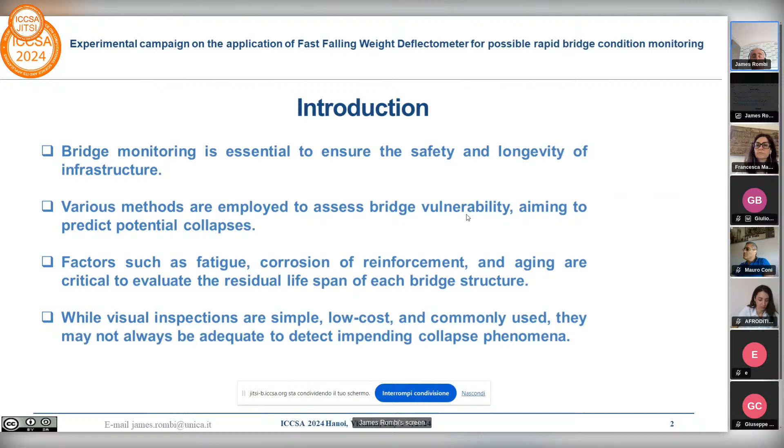As we know, in 2018, there was a large collapse with the Morandi Bridge in Italy that prompted a significant call to improve monitoring in road infrastructure. This triggered widespread attention for the formulation of specific guidelines by the Italian Ministry of Infrastructure and Transportation.

On the basis of this information and what happened, we thought to develop a non-destructive, rapid, repeatable over time, efficient system using the fast falling weight deflectometer to perform tests on reinforced concrete bridges. As we know, the fast falling weight deflectometer is a non-destructive measuring system used normally in rigid, semi-rigid, and flexible pavements to evaluate stiffness and pavement stresses across various types of materials. In this research, we use it to predict and measure the stiffness on concrete bridges, divided into single span and multiple span bridges.

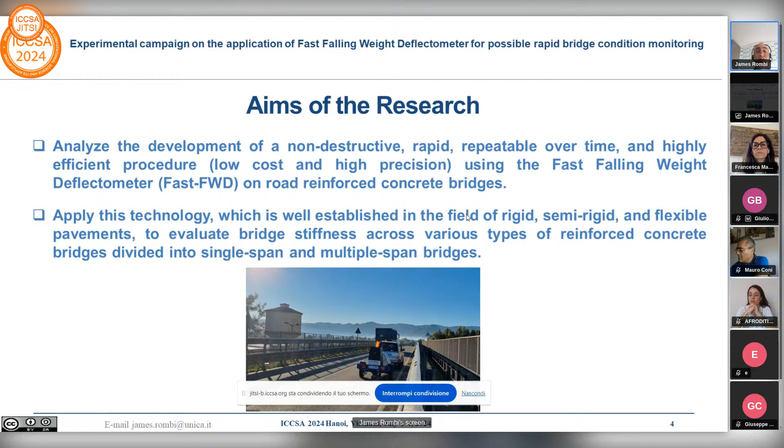So let's go to the case study. The testing campaign was conducted on 8 reinforced concrete bridges located in the southern region of Sardinia. You can see here in these pictures the location of each bridge that has been tested. They are all in the province near Cagliari, in the southeast of Sardinia.

On your right, you can see a table with the bridge type, the 8 bridges, and some geographical information, the length and the width. Also additional information that was useful for us to locate exactly where the bridge was, because these are bridges all located on roads, and some bridges were overpass arch bridges on railways.

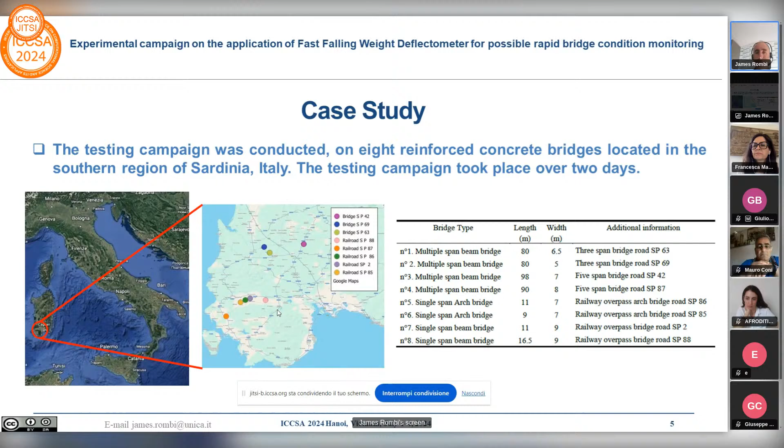So we had 2 big families: multiple span bridges, there were 4, and the other 4 single span bridges, divided into single span and arch bridges. So, before performing the test campaign, a schematic grid of testing points was established for each bridge, taking into account the geometrical structure. As we can see in this chart, this is one of the bridges that we tested. There is a total of 45 testing points.

The circles that you see in different colors are where the falling weight performs its tests. The circles marked in purple are performed on the deck. Then we've got the red in correspondence of the beams, and the green ones are those tests performed on the approach ramp. For each bridge, this was done. So once you go to perform the test, you know exactly where to position the falling weight deflectometer.

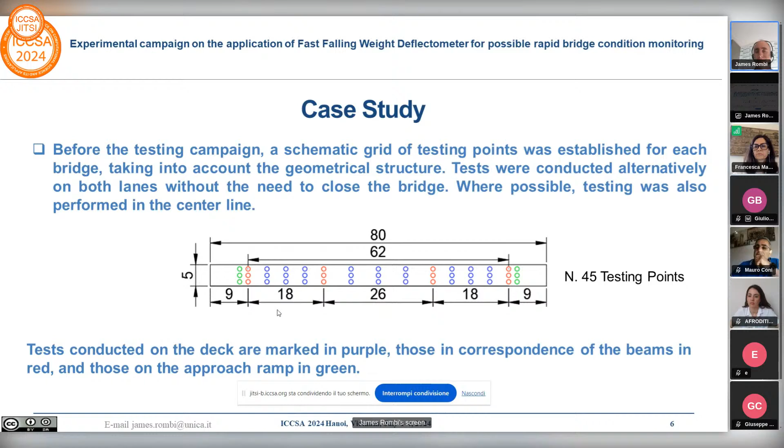It performs a dropping of weights on the surface from a specific height, and with geophones we are able to measure the speed and the extent of the deformation on the pavement, in this case, on the bridge structure. To better understand how it works, we see here this short demonstration.

The falling weight goes into position on the element that we need to test. We lower the bars with the geophones. The weight rises, and then it drops. The geophones capture the deflection bowls. We must say that in this case study, we used in total 12 geophones. Then you raise the plate and you're ready to go to the next point. All this procedure lasts less than 1 minute. So it's a very fast testing procedure.

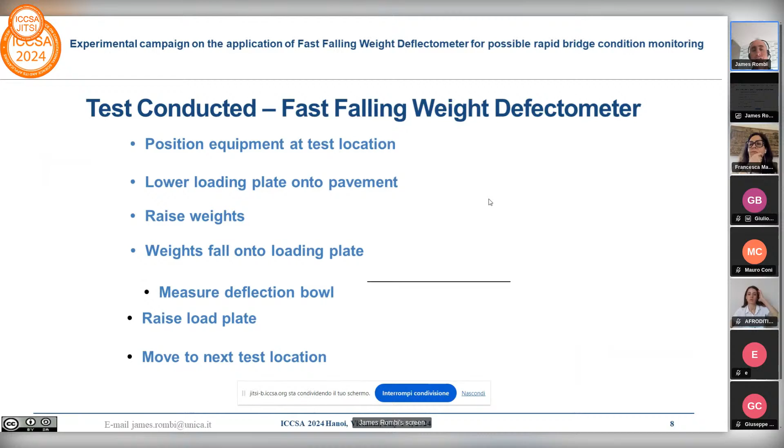So let's see the data analysis. I must say that this is just the beginning of this research, so we've got many data to analyze. This is what we analyzed first. The methodology employed the analysis of the stiffness value obtained from the ratio between the maximum load applied and the maximum deflection. When we did testing, we did increasing vertical stress levels. We performed first 900 kilopascal, 1200, and finally 1600.

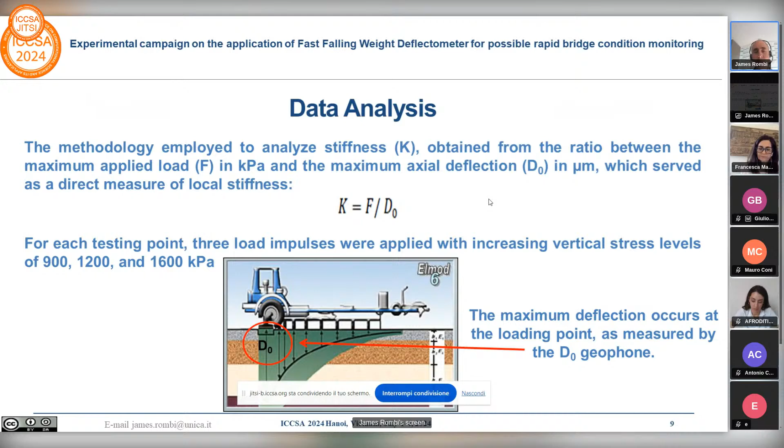On the basis of this result, we measured the maximum deflection, measured by the geophone D0 that is positioned underneath the load plate. Here we see the first data analysis on the first 4 bridges. I must remind you that the first 4 bridges are those with multiple spans. We can see the values obtained for the beam, the deck, and the approach ramp. We measured not only these values, but also the standard deviation between these values.

As we can see, the maximum stiffness was obtained by measuring the beam, and the lowest was on the approach ramp, but that is expected because the approach ramp is not made of concrete, but is a normal layer with bitumen and a foundation with granular materials. So it was just to see how the data could vary in measuring different types of materials.

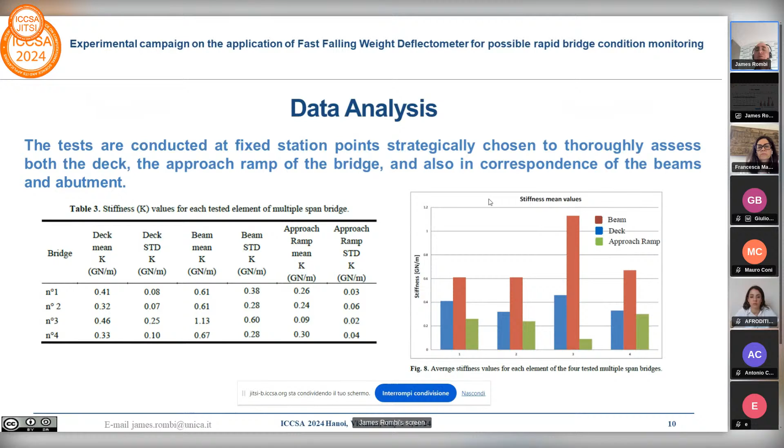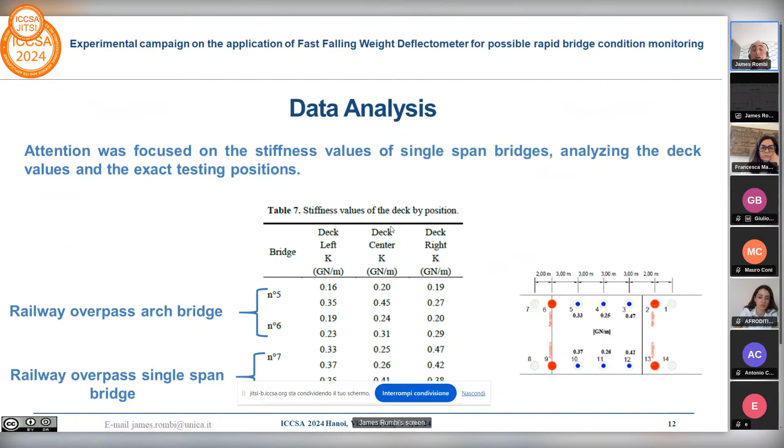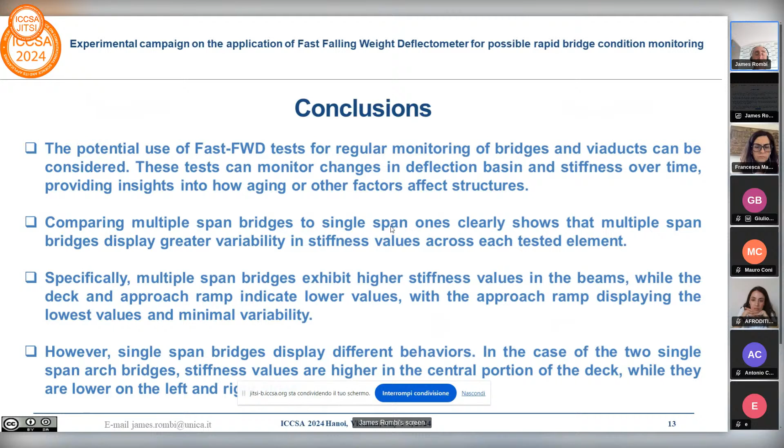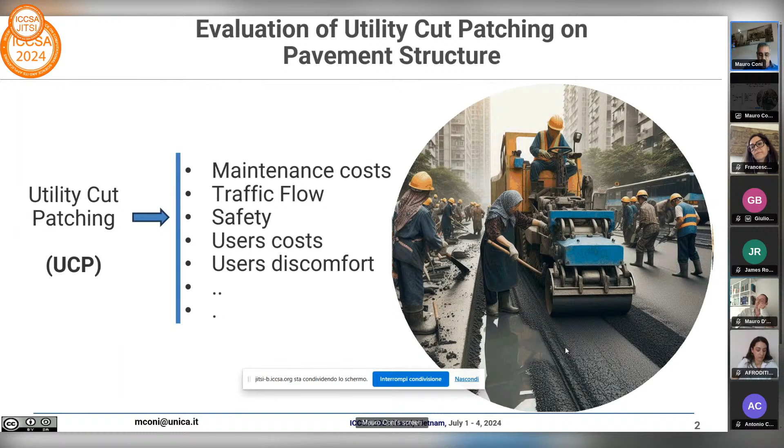UCPs disrupt the static behavior of the pavement, producing cracking, permeability, and friction deterioration. Structural strength, stiffness, durability, and reliability decrease, while deformation and dynamic load increase. Despite the importance of UCPs for infrastructure maintenance, there is a critical lack of quality control in their execution, resulting in rapid deterioration of the pavement in a few years. These reasons have led many road authorities to investigate how to control and reduce the impact of UCPs on pavement.

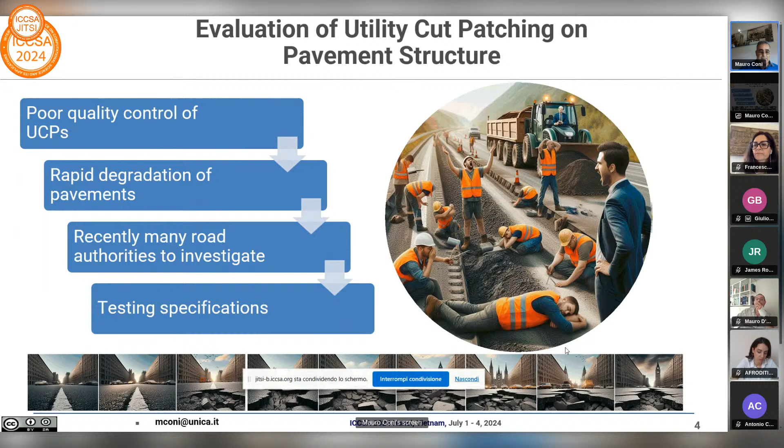In the paper, we present a case study of a bidirectional urban road where a water pipeline was constructed in 2019 in one of the two lanes. The bituminous pavement was cut to a width of 70 centimeters and a depth of 100 centimeters to install the water pipeline. The filling substrate material was the same as the excavated one, and no information is available about its compaction. After that, the pavement was restored with the same thickness and material.

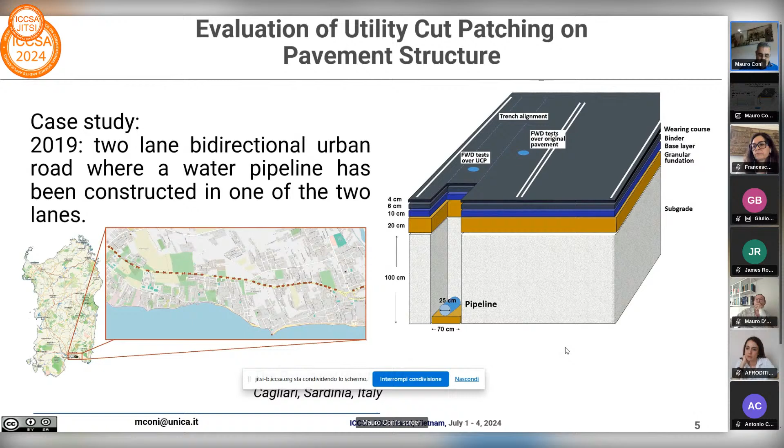The effect of UCP was investigated using the in situ non-destructive falling weight deflectometer, comparing the structural quality of pavement with and without UCP. As the previous presenter James showed, the fast falling weight deflectometer generates a sinusoidal impulse of 30 milliseconds in a window of 60 milliseconds and loads a circular plate of 30 centimeters with higher resolution. The test was repeated 3 times, and in the analysis we refer to the largest impulse, corresponding to about 9 tons on the plate load.

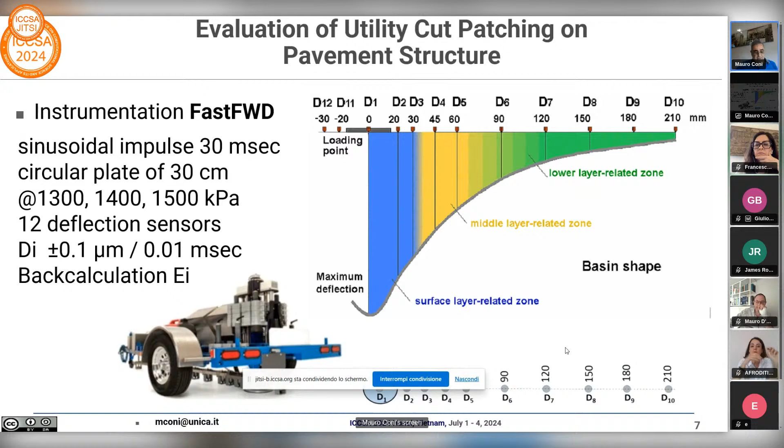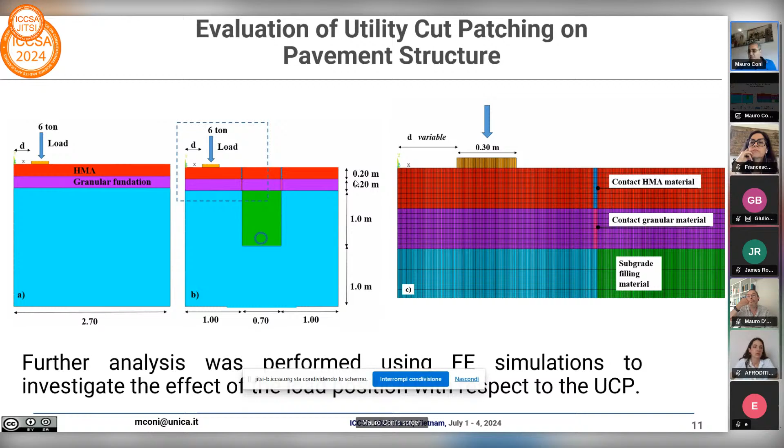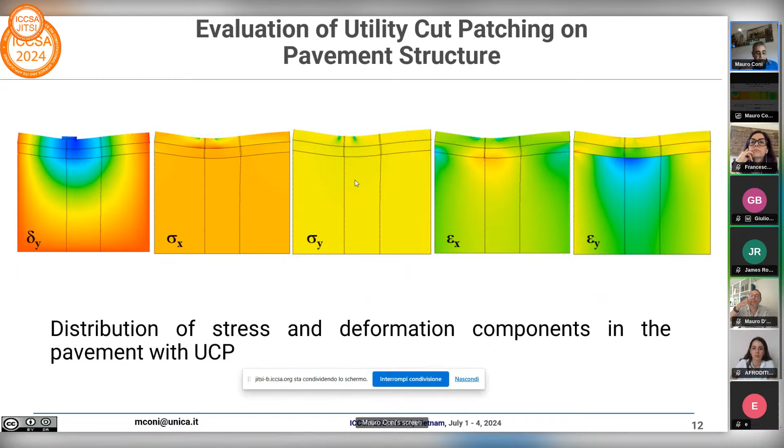This figure shows the distribution of stress and deformation components in the modified model, assuming a load located above the left joint of the UCP. Of course, the response depends on the position of the load. For this reason, one of the aims of the finite element simulation was to assess the effect of the load position relative to the UCP. The load, represented by a circular plate load of 6 tons, was located at different distances from the border of the model, and we derived the profiles below the load axis of displacement, horizontal stress, and horizontal and vertical deformation. And this is the summary result.

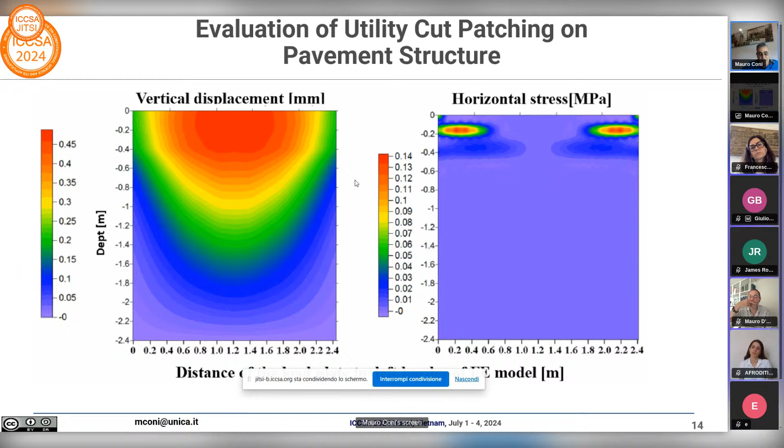The maximum deflection, about half a millimeter, occurs when the load is located at the center of the UCP. Values very close to this are also observed for load positions outside the UCP in a large range around it. The maximum values of horizontal tensile stress, about 0.14 megapascals, occur in the granular foundation when the load is located outside the UCP.

Similarly, horizontal deformation results in tension at the base of the asphalt when the load is placed at the border of the UCP, with a value of about 150 microstrain. Lower values are obtained when the load is located at the center of the UCP. Finally, vertical deformation reaches a maximum value of about 350 microstrain when the load is centered above the cut.

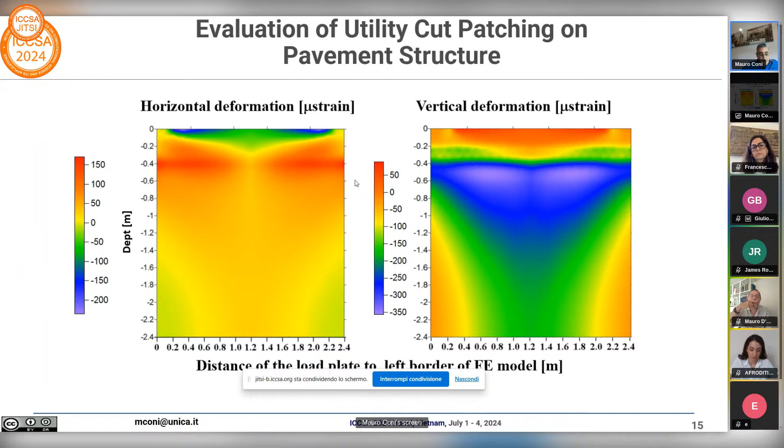In conclusion, the paper highlights the need for a management system to address UCP-related issues by employing falling weight deflectometer tests and finite element simulation. Results indicate increasing pavement deformability and variability due to the UCP, affecting pavement performance and reliability.

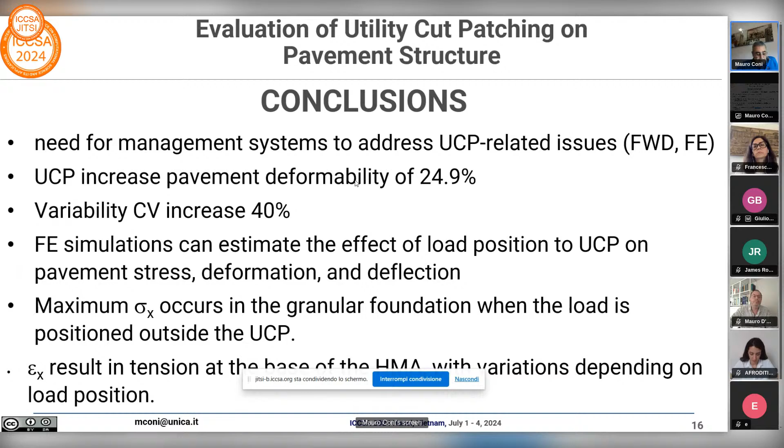Finally, we performed a systematic literature review, conducted according to the PRISMA methodology, which returned more than 250 relevant studies of UCP, and in this survey we can identify some key factors influencing UCP and future research directions. Thank you. If you have any questions.

Thank you, Mauro. If somebody has some, okay, Mauro D'Apuzzo. Sorry, but it sounds natural to me, you know, to interact with some friends. It's good, Mauro. We appreciate the question, Mauro.

I do have to compliment Mauro on this excellent exploratory work on UCP. That is a very critical issue in a municipal area, indeed. I'm just thinking about if you are planning to study alternative cutting layouts aimed at reducing the stiffness differential between the UCP area and the outside UCP area.

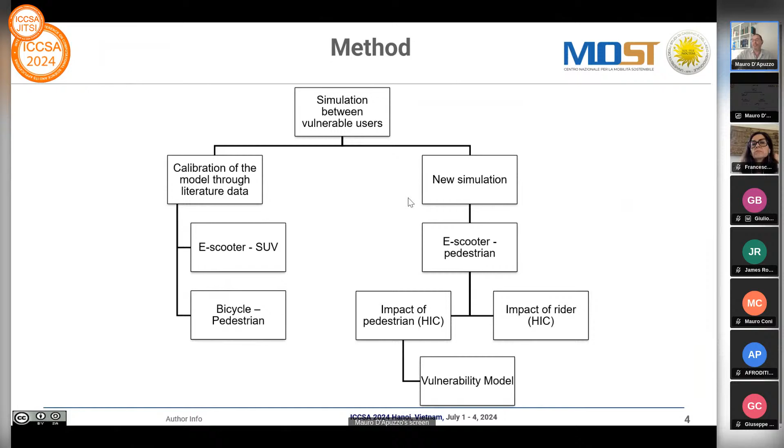A first path devoted to the calibration of this software by comparing the results provided by these simulation tools with some more refined simulation tools, in order to have a good reliability of these simulation tools. And then we perform a first experimental, we may say, design of crash scenarios involving some vulnerable users.

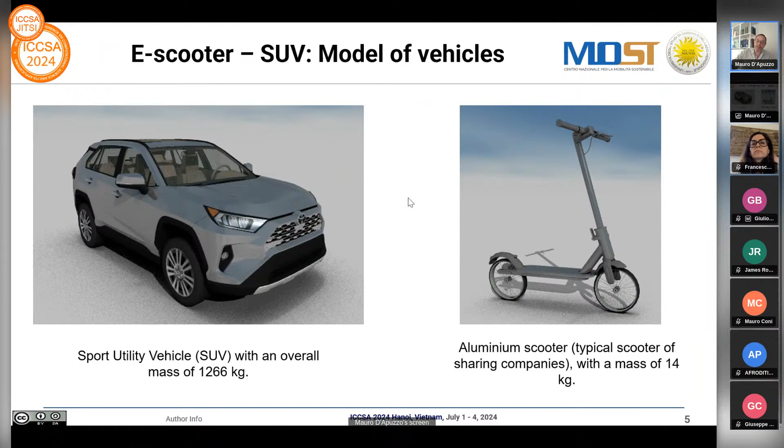The first part is devoted to the calibration. We looked through the scientific literature and found very few papers involving simulation of e-scooters with a vehicle. We picked this specific scientific paper dealing with this simulation scenario. According to this paper, 4 different impact scenarios were simulated.

The first one is a lateral impact on the bonnet of the vehicle. The second and the third one are a lateral impact on the B-pillar of the vehicle. The B-pillar, I just want to remind you, is the vertical frame dividing the two side doors of the vehicle. So it's a very stiff element in the lateral surface of the vehicle. That's why we also consider this scenario.

The difference between these two scenarios is related to the layout of the e-scooter rider. In the second scenario, the body of the scooter rider is upright, whereas in the third scenario, the body of the e-scooter rider is leaning forward, trying to simulate some sort of evasive maneuver such as a braking maneuver. And finally, the fourth scenario is a frontal impact.

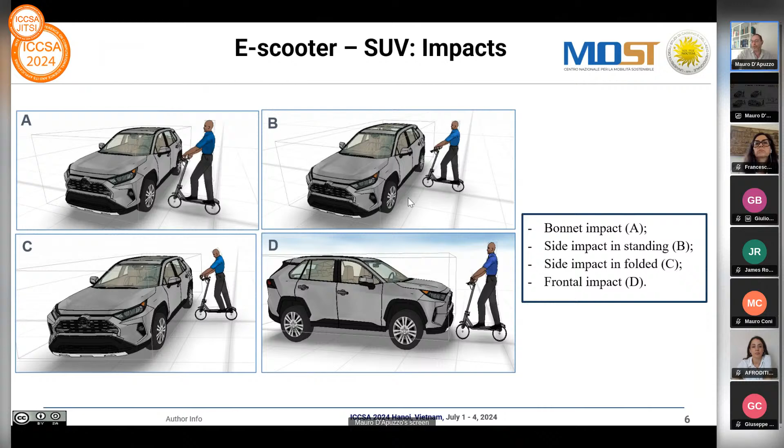Okay, so we have the head acceleration time history for the four scenarios investigated by using these multi-body accident reconstruction simulation tools. And we compare this peak head acceleration value with those provided by the scientific literature. What's the difference?

In the scientific literature a very general purpose simulation tool was used, named MADYMO, and as most of you already know, MADYMO is a very famous tool used in road safety and automotive safety, because it is able to take into account the stiffness and therefore the deformability of the surfaces that come into contact during the impact. Whereas in the simulation tools that we used, this is not possible. And obviously this implies a lower computational cost.

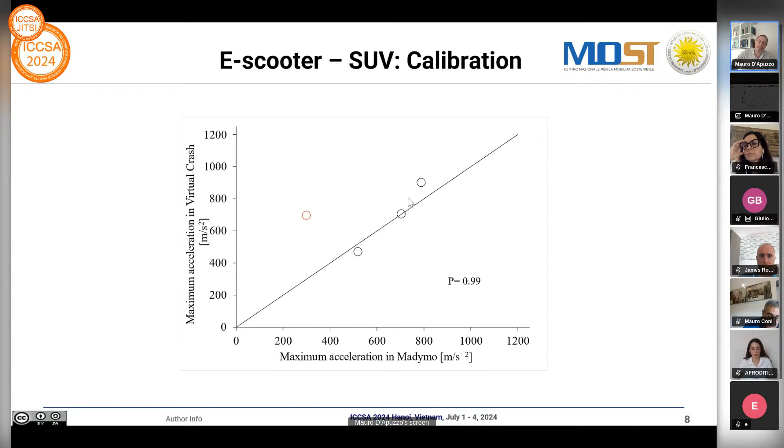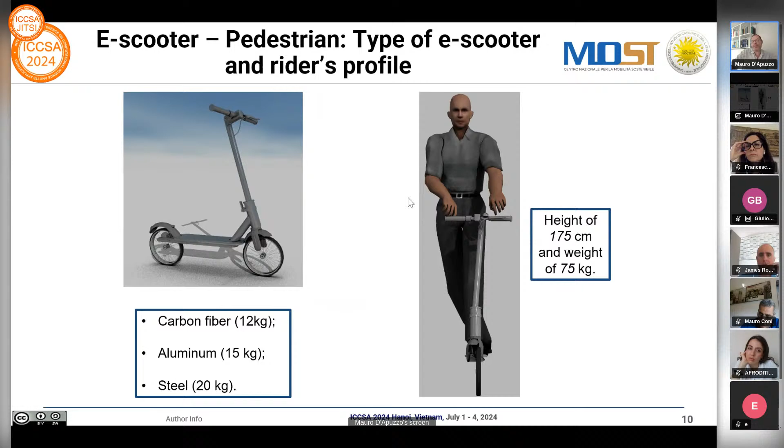Then we came up with the first numerical simulation campaign involving pedestrians, obviously different kinds of pedestrians. You can see the anthropometric data related to these pedestrians: an adult, an old pedestrian, and a boy. And obviously, we also vary the type of scooter, and we assume an adult driving this e-scooter.

The simulations on which we performed a numerical reconstruction through these multi-body tools were mainly 5. A frontal impact, with an off-center, so there was an offset: the pedestrian and the e-scooter rider were not aligned. A lateral impact and a rear impact, aligned and not aligned with an offset.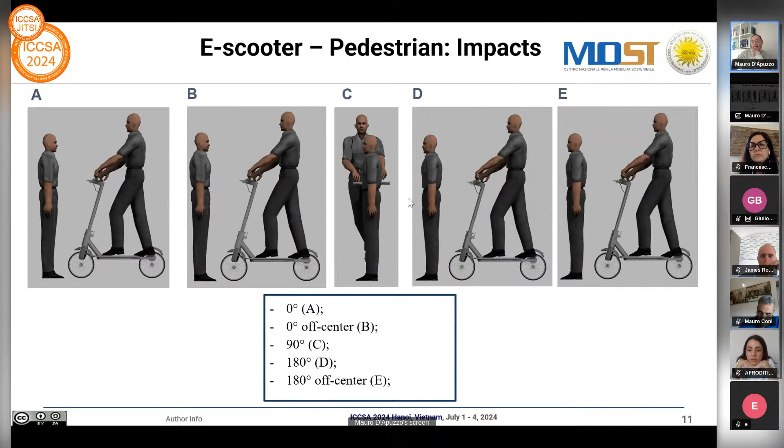We are obviously interested in evaluating the HIC, the head injury criterion, which is the most relevant parameter that you can derive from an acceleration time history of the head, and is the most recognized synthetic parameter, since it is mainly related to the injury that the pedestrian or the scooter rider will undergo following the impact.

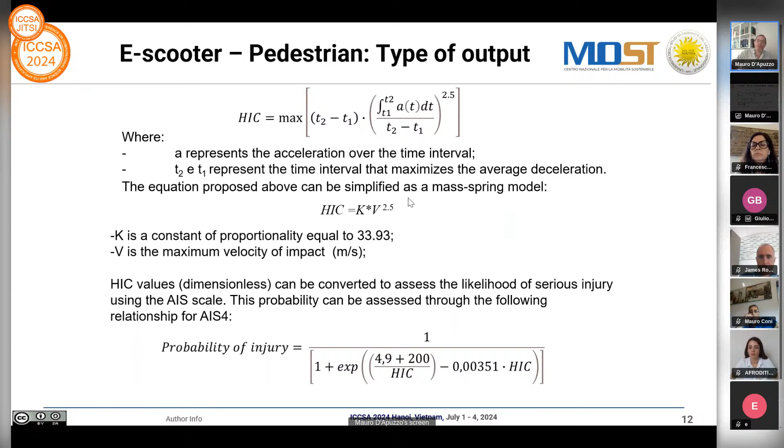As you can see in the lower part of this slide, there is, for example, a typical relationship proposed by Prasad and Mertz, expressing the probability of an Abbreviated Injury Scale 4, which is related to death. It is related to the HIC level provided by the simulation.

Following this not so satisfying scattering of the outcomes provided by the simulation, we came up with an idea of using a different explanatory variable in order to develop an injury function, and there we came up with this other formulation employing a simple physics-based explanatory variable, such as the kinetic energy, and we use these variables also to capture the behavior on offset impact by using the dimensionless overlap contact surface. And therefore, we came up with a more reduced scattering of the outcome of this simulation.

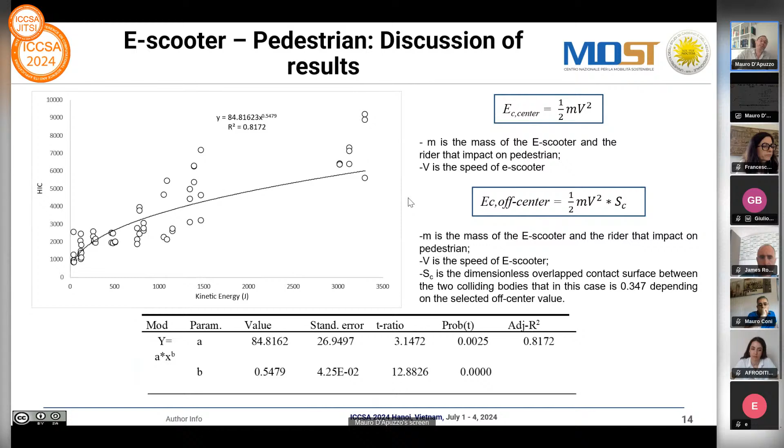A final comment on the outcomes and injury level suffered by the pedestrian and the e-scooter rider, that is mainly neglected in the current scientific literature. If we take into account the frontal and rear impact, as you can see, both pedestrian and e-scooter rider are encountering the same probability and same injury level, by varying obviously the impact condition that we analyze. Whereas if we consider the side impact and the off-center impact, we notice a worsening of the HIC level for the rider compared with the pedestrian.

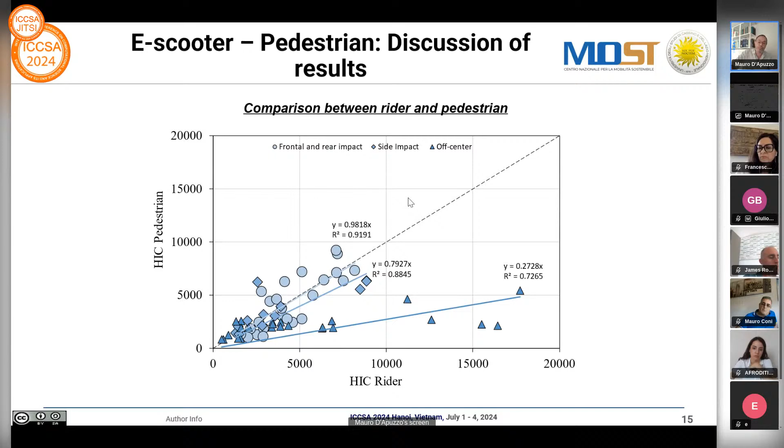And by analyzing the animation and the kinematics of this accident, we came to the conclusion that this can be mainly due to the fact that the pedestrian following the impact will start a rotation, so most of the momentum transmitted by the impact will be converted into rotational kinematics, and this will somehow raise the arms of the pedestrian. So the pedestrian, when falling on the ground, will be somehow protected by these arms, contrary to what is happening for the e-scooter rider.

So, coming to the conclusion, when a scooter collides with a pedestrian, much of the momentum is transferred to the pedestrian, leading to a longer launch distance and higher head-to-ground impact speed, resulting in a more serious potential head injury. Similarly, the results also show that the outcomes of the accident between scooters and pedestrians depend on the direction of impact. What happens to the rider head for the impact was also analyzed. It turned out that the HIC suffered by the rider is by no means negligible and highly depends on the angles of contact. To reduce the peak speed of the head in the contact with the ground, the use of a helmet is therefore strongly recommended.

Impact analysis is able to capture the complexity of this proposed accident scenario and provide a reliable estimate of possible outcomes. By extending the field of simulation scenarios to be investigated, it's believed that it will be possible to achieve a better understanding of the problem and provide prediction functions for pedestrian vulnerability. For the scenario it will be essential to focus on the use of helmets and how they may or may not reduce the HIC values.

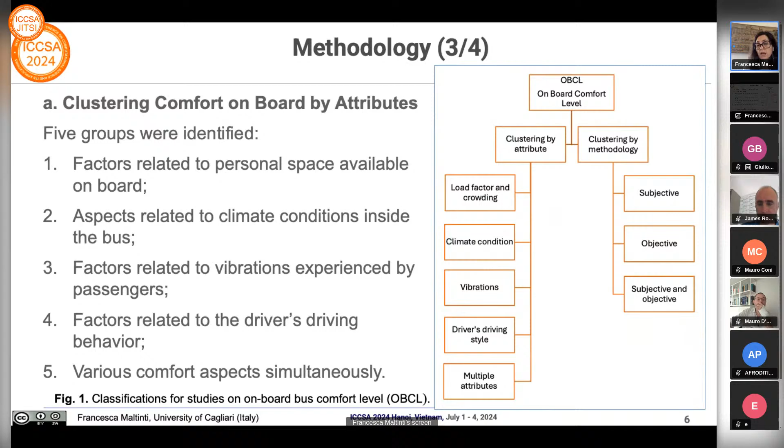Switching to the other classification, OBCL assessment employs three main approaches: subjective, objective, and combined methods. The subjective approach captures passengers' viewpoints on various attributes through customer satisfaction surveys. Objective measures certainly provide an unbiased evaluation of OBCL.

Technical tools such as accelerometers, which offer unconditioned data, offer a means to monitor various comfort attributes. But the emerging approach to assess OBCL involves evaluating comfort aspects through both subjective and objective means. The analysis of the studies available in literature reveals both the advantages and disadvantages of subjective and objective analysis.

Subjective analyses of OBCL in public transportation are vital as they capture user perceptions, helping agencies enhance services to meet passenger expectations and attract more users. However, subjective ratings can be influenced by factors like socioeconomic background, personal comfort, mood, past experience, and external conditions, such as fare hikes. Thus, focusing solely on passenger views may be limiting, especially with non-representative samples.

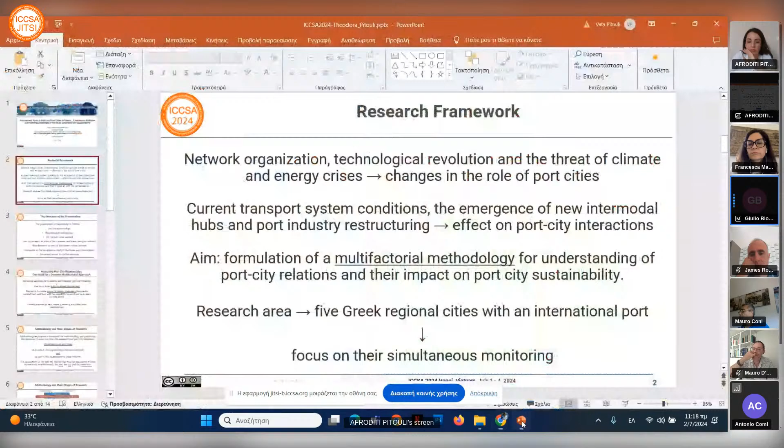Aphrodite, we can't see the full screen presentation. Try again to switch. Okay. No. Full presentation, full screen. Sorry. Now it's okay? No. Sorry. Just a minute. The button on the right near to the zoom bar. It's not working. I don't know. Perhaps you need to repeat the sharing procedure and select the full screen mode and then select the full screen presentation mode. Exactly. You have to select entire screen sharing, then put the presentation in full screen mode. Now? Now it's perfect. Yes. Perfect. It's okay. Okay, thank you.

Well, in an era of network organization, technological revolution, and the threat of climate and energy crisis, the role of port cities is constantly changing. At the same time, current transport system conditions, the emergence of new intermodal hubs, and changes in the port industry are dramatically affecting port-city interaction, challenging the traditional mutually beneficial relationship between these two systems.

In the context of the above assumptions, the article aims to formulate a multifactorial methodology for optimal understanding of port-city relations and their impact on port-city sustainability. Taking 5 Greek regional cities with an international port as a research area for the proposed methodology, the focus is on the monitoring of these cities using quantitative and qualitative criteria. The presentation follows the structure of the paper.

After introducing the problem to be addressed, the presentation is organized as follows: approach to port-city relationships, description of the proposed methodology, presentation of the 5 port cities studied, examination of their importance as hubs in the European and Greek transport network, approach to their dynamics as part of the Hellenic urban network, focusing on 3 spatial levels: the port, the city, and the waterfront, presentation of the results of the comparative study of the selected Greek port cities, and of the crucial issues for further research.

As port and city are two often contradictory but mutually reinforcing systems, assessing their relationship is a complex issue. The current literature has formulated many approaches to assess and measure port-city dynamics. Reviewing existing literature, the focus is on indicator-based approaches. The large number of indicators identified reflects the richness and complexity of the issues related to port cities.

In order to ensure optimal assessment of competitiveness and the sustainability of port cities, existing knowledge is used to organize the main themes of criteria and indicators that allow multifactorial monitoring of port-city relations and their impact on local and regional development. The aim is to create a pool of criteria and indicators that can be updated and enriched. This review led to formulating the proposed methodology and identifying the evaluation criteria.

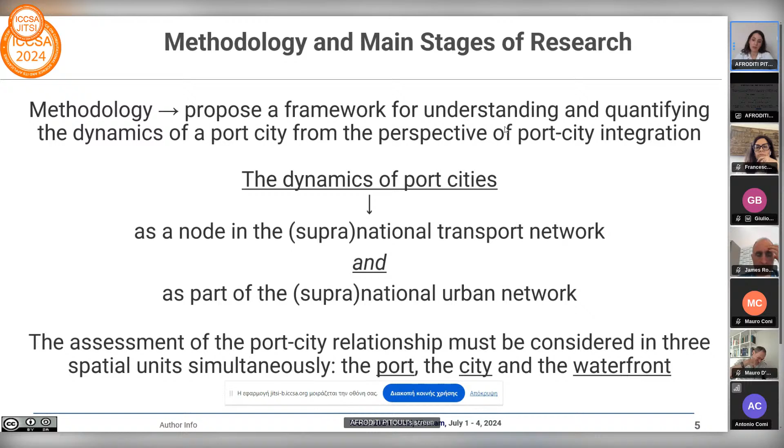Based on the above assumptions, the article attempts a comparative study within a dynamic multi-level and multifactorial approach, incorporating spatial criteria in 6 thematic areas, namely centrality, demographic and socio-economic characteristics, accessibility and connectivity, natural cultural heritage, built environment, and supra-local infrastructure. At this stage, for each spatial unit, quantitative indicators are developed.

These will be complemented by crucial issues such as port city waterfront governance, ownership status, port and spatial policies and planning approaches, stakeholders, and participatory planning. At a later stage, an attempt will be made to conduct a detailed study combining quantitative and qualitative indicators.

According to Greek national ports policy, ports are divided into 4 groups: ports of international interest, ports of national importance, ports of major interest, and ports of local importance. In this research, particular attention is being paid to small and medium-sized cities in the Greek periphery, as the operation of a port of international importance is a complex, contradictory, and challenging planning issue.

On the one hand, medium-sized cities face multiple pressures from port operation due to their limited size. On the other hand, they cannot always support the global role of their ports, mainly due to the lack of infrastructure. Furthermore, as the quality of the inland transport infrastructure is becoming one of the most critical factors in the competitiveness of ports, focusing on the mainland gives the chance to study a port city as a part of land transport networks.

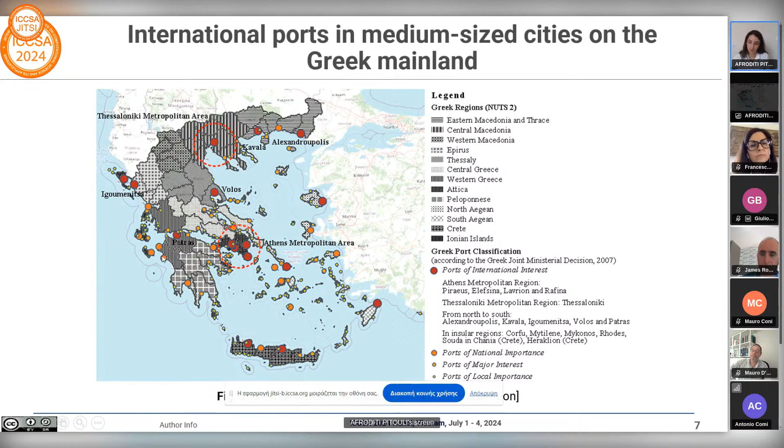The importance of Greece in the global and European network is crucial due to the geostrategic and geopolitical position of the country. Regarding the port network, the ranking of the 25 Greek ports in the Trans-European Transport Network recognizes their contribution to the European economy. Among the regional ports of international scope studied, Patras and Igoumenitsa are part of the national network, while Volos and Kavala are included in the extended network. Note that the port of Alexandroupolis is not included despite its strategic location.

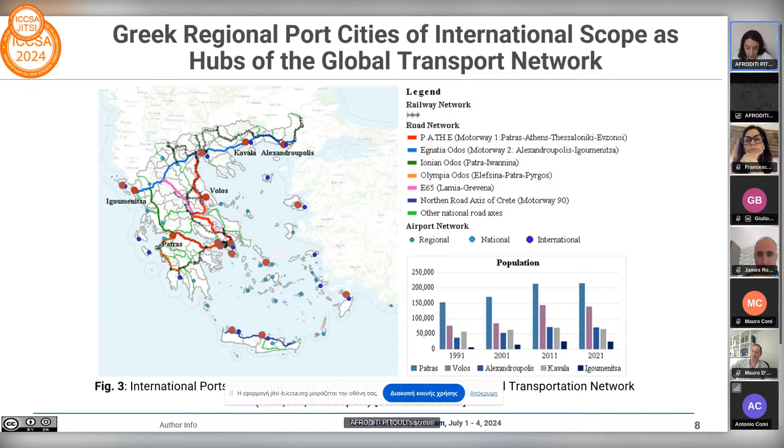Regarding hinterland accessibility, it is considered by taking into account the geographical proximity of the port cities studied to the main national motorways and railways. Despite the strategic importance of port rail links for port development, most regional ports in Greece have no direct rail links. Finally, the use of complementary modes in maritime and air transport is of growing interest in transport planning. For Kavala, Volos, and Patras, their nearest airports are at a distance up to 40 kilometers, while the closest airport to the port of Igoumenitsa is further away.

In order to assess the dynamics of the 5 ports, particular attention is paid to the analysis of data related to the following criteria: port function services. Generally, the 5 ports studied have a wide range of cargo and passenger handling services. Concerning container traffic, only the port of Volos had such services until 2017, while the port of Patras has been providing container handling service since 2018.

Turnover profit. Alexandroupolis has the lowest rates, while Patras and Igoumenitsa recorded the highest turnover. Note that Igoumenitsa and Patras have had similar turnover rates since 2017. Traffic volume. In coastal shipping and passenger transport, the port of Igoumenitsa ranks first, followed by Kavala, with Alexandroupolis in 5th place. Furthermore, Igoumenitsa is almost every year the #1 port in terms of traffic.

Port governance. The privatization of the two major ports of Piraeus and Thessaloniki has influenced the Greek port system governance model and development prospects. In recent years, the privatization of the international ports of Alexandroupolis, Kavala, and Igoumenitsa has been at the center of the debate, but only Igoumenitsa has been privatized.

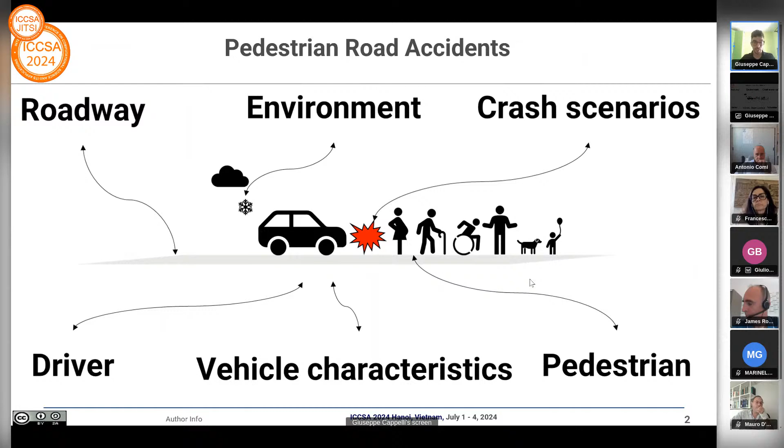The context in which these analyses are made is sustainable development. Sustainable development is that effort to find a compromise between the needs of the present without compromising the future. So it is a sustainable compromise between economy and profit. For example, we have to make profit, but in a sustainable way.

Find a balance between environment and earth and our action, and also find a compromise between society and people with the aim to guarantee a good future for the next generation. So, in my opinion, the main objectives of sustainable development are fair, doable, and also manageable.

The main document that puts the emphasis on sustainable development is the Agenda 2030. This document, made by the UN General Assembly, finds 17 objectives that are somehow related. The theme of sustainable development falls under Objective 3, that is good health and well-being, Objective 9, that is industry, innovation and infrastructure, and Objective 11, sustainable cities and communities.

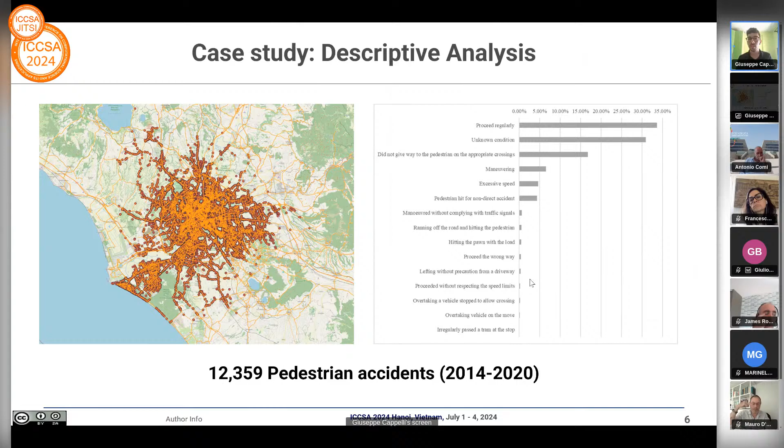Some other variables that influence pedestrian crashes are road characteristics. For example, excessive speed, maneuvering, the vehicle that proceeds regularly and so didn't see the pedestrian. And surprisingly, there is a large proportion of pedestrians hit for a non-direct accident, and that is a critical aspect to bear in mind.

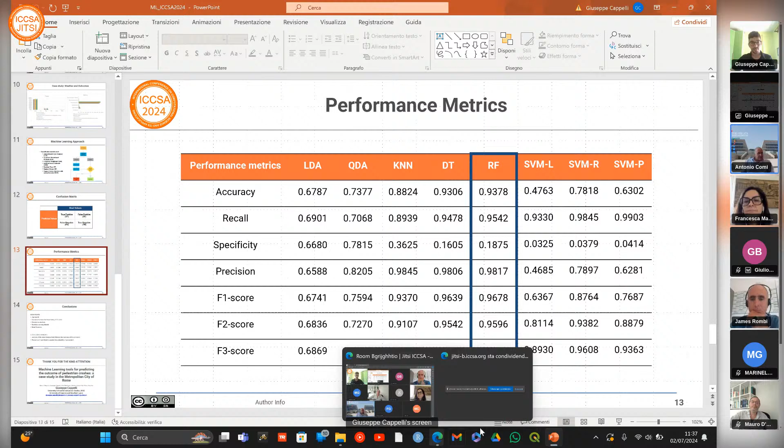Thank you so much, Giuseppe. Only, can you show again slide 12, please, in order to understand which are the dependent and independent variables in your model, what the tools are forecasting.

Okay, sorry if I interrupt you, but we have to go speedily because we are quite late. Only, pay attention not to use a lot of variables and end up with a quite rigid model that is good for the training and the test sets, and so difficult to use for other cases.

Another thing I would like to suggest to you is to pay attention to some variables, considering that it's quite strange to see that on the weekend, when the number of pedestrians could be higher, the number of accidents involving people is lower, and pay attention to the reason. Probably it depends on the built environment where the road accident happens, and also consider the aim of the travel.

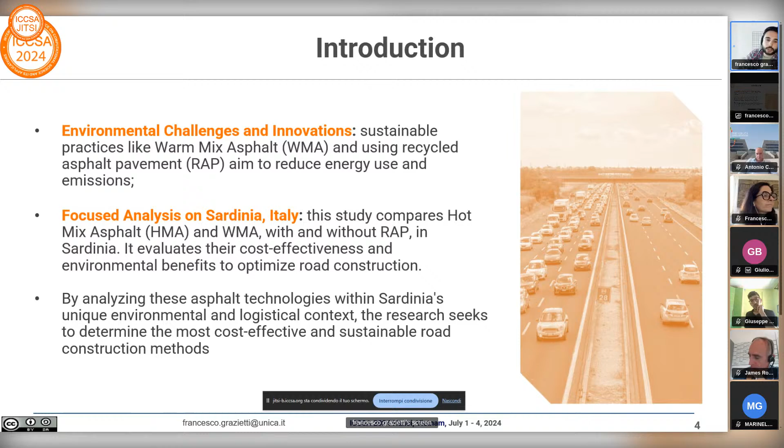Specifically, we analyzed this technology in Sardinia to find the most cost-effective and sustainable construction methods. So we will define the different types of asphalt, and we discuss the advantages and disadvantages of these types. HMA is a traditional asphalt technology involving high temperature production, making it strong and durable for heavy traffic and adverse weather. However, it consumes significant energy and emits greenhouse gases. And despite its advantages in strength and cost effectiveness for large projects, the environmental impact is very important.

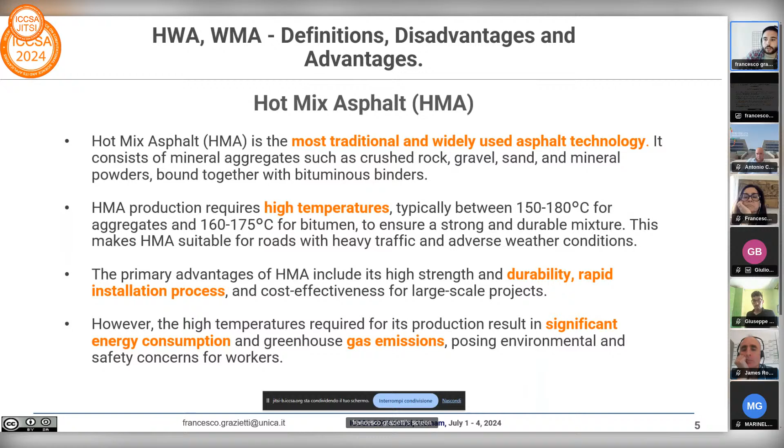Another type is the warm mix asphalt, WMA. WMA is produced at lower temperatures, reducing energy consumption and emissions. It has better workability at low temperatures and greater safety for workers. However, its physical and mechanical properties can be inferior to HMA, and the additives used may increase production costs.

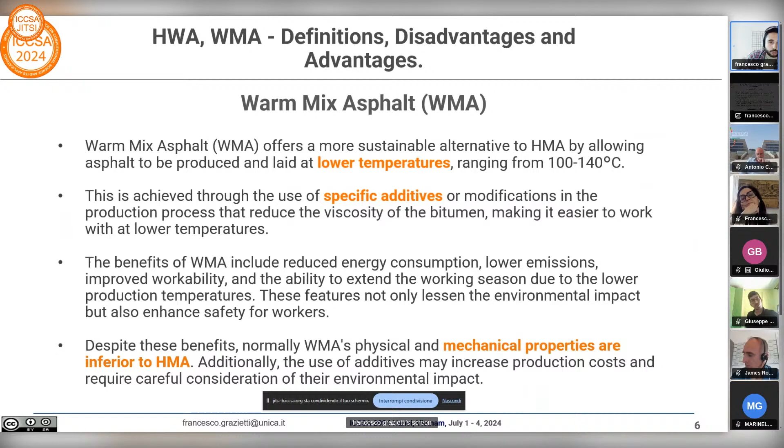In addition to WMA, there is another sustainable practice involving recycled asphalt pavement, RAP. RAP involves reclaiming materials from existing pavements and incorporating them into new HMA or WMA mixtures. This practice enhances environmental sustainability by reducing the demand for new materials and offers significant cost savings. However, the integration of RAP presents challenges, primarily due to the aged and oxidized bitumen it contains. This aged bitumen increases the stiffness of the mixture, which can negatively affect the overall performance and workability of new asphalt. Therefore, careful consideration and optimization of RAP usage percentage are crucial to maintain the desired quality and durability of the pavement.

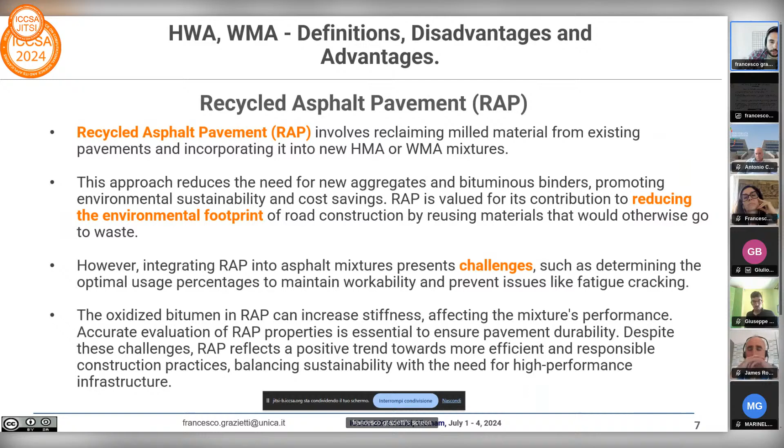In the last part, the report talks about the percentage of reuse of the asphalt. Sorry, I lost my place. The reuse of RAP in HMA, WMA, Half-WMA, and CMA.

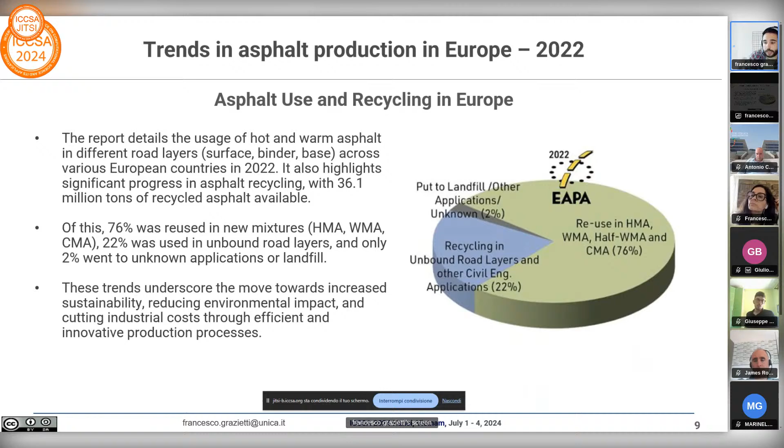The figures show the percentage of reclaimed asphalt that was reused. For the calculation of these values, only countries providing full data were considered. With this background, we can focus on the study in Sardinia.

Okay, this study evaluates the economic impact of using different asphalt types in Sardinia, considering 2024 material prices. Sardinia's unique geographic context helps us isolate variables like raw material availability and climate. We examine 4 asphalt mixes to identify the most cost-effective and sustainable practice.

The first one is HMA with virgin material. The second is HMA with 25% RAP. The third, WMA with virgin material, and the fourth, WMA with 25% RAP. The analysis considers resource cost, energy savings from WMA, and land savings from reduced virgin material use, highlighting the financial and environmental benefits of different mixing techniques.

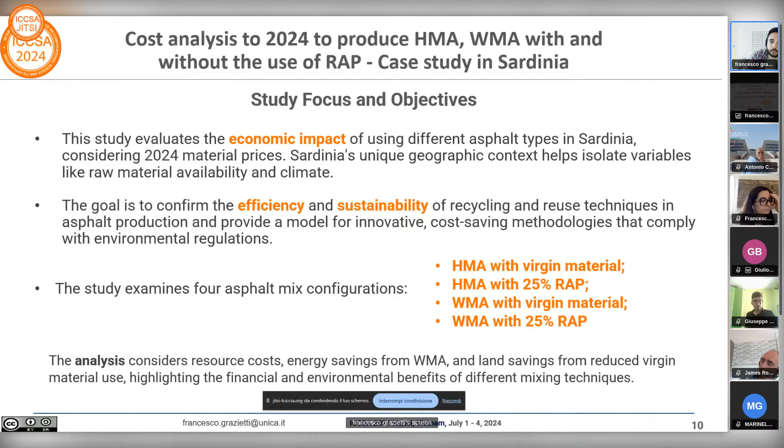For the study, a new generation asphalt plant present in Sardinia was taken into consideration. This type of asphalt plant ensures high quality control, but the problem is that the plant has higher initial operating cost. Innovations like LPG fuel, advanced burner systems, and photovoltaic-supported canopies enhance energy efficiency and sustainability. Following this, we'll examine the mix design components.

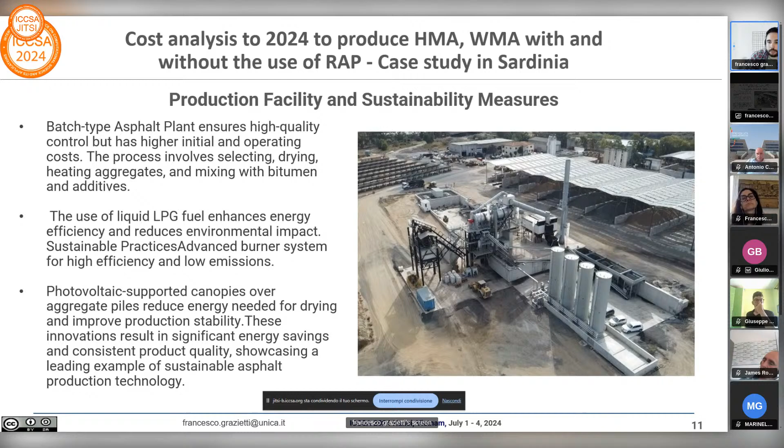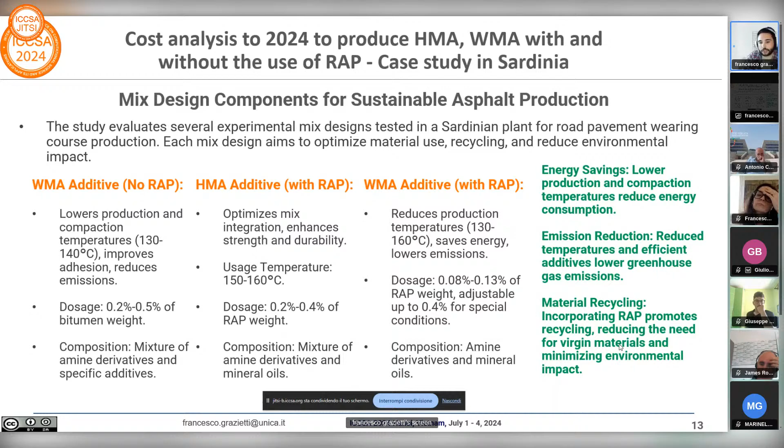The additives considered are three: one additive for WMA with no RAP, one for HMA with RAP, and the last one for WMA with RAP. The goals are energy savings, with lower production and compaction temperatures reducing energy consumption; emission reduction, with reduced temperatures and efficient additives lowering greenhouse gas emissions; and the last one, material recycling, since incorporating RAP promotes recycling, reducing the need for virgin material and minimizing environmental impact.

So the cost analysis compares expenses for the different mix designs we tried. Bitumen cost has a significant impact on expenses, while additives, though increasing initial cost, improve mix performance and efficiency. Energy savings from lower production temperatures also contribute to cost reduction. Starting with the RAP component, there's no cost for mixtures without RAP, but for those with RAP, the cost is €1.63 per unit.

Next, consider the sand. The fine sand costs €7.50 more or less for HMA. For WMA, slightly cheaper. In the end, we can see that the euro per ton for the mix design HMA without RAP is €51 more or less. The WMA is cheaper, but not by a lot. The HMA with RAP is €43.05, and the last one €43.16.

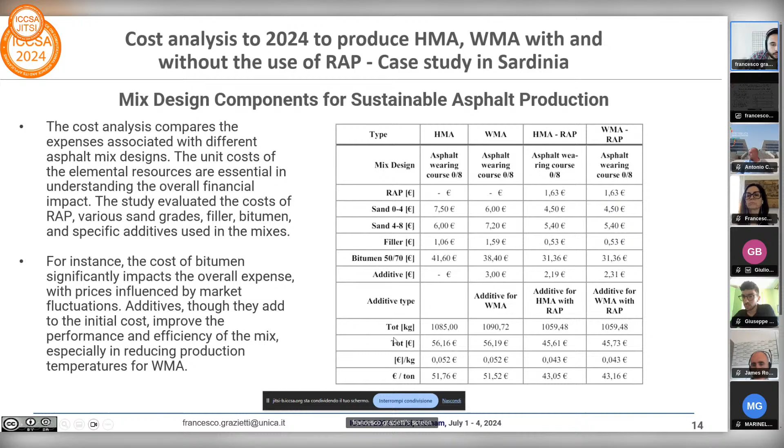Okay, the study also examined the energy efficiency and the environmental impact of the different mix designs. Warm mix asphalt technology demonstrates savings compared to hot mix asphalt. During the cold season, HMA has an average gas consumption of 3.7 normal cubic meters per ton, while WMA reduces this to 3.1 normal cubic meters per ton, leading to cost savings and environmental benefits.

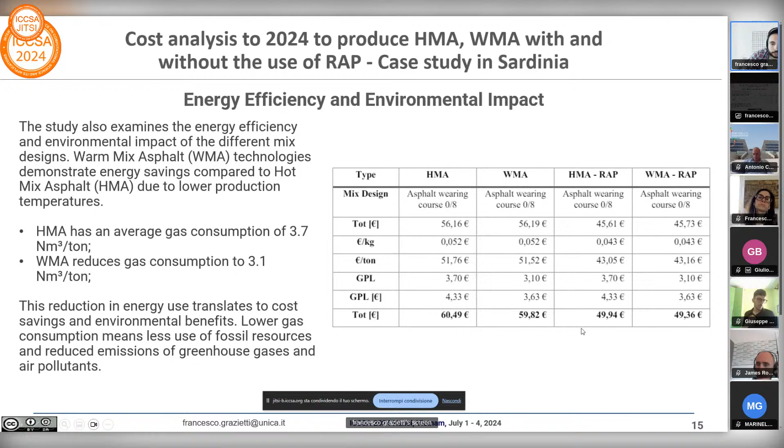In conclusion, warm mix asphalt pavements reduce energy consumption, but require a balance between economic management, due to costly additives, and mechanical performance. The addition of reclaimed asphalt pavement, RAP, in the mix design significantly reduces cost and the carbon footprint, but it also must meet the required mechanical performance during the design phase. These results support global strategies for road infrastructure that emphasize environmental compatibility with economic feasibility, aligning with the principles of the circular economy. Thank you for the attention.

Sorry for the problem before.

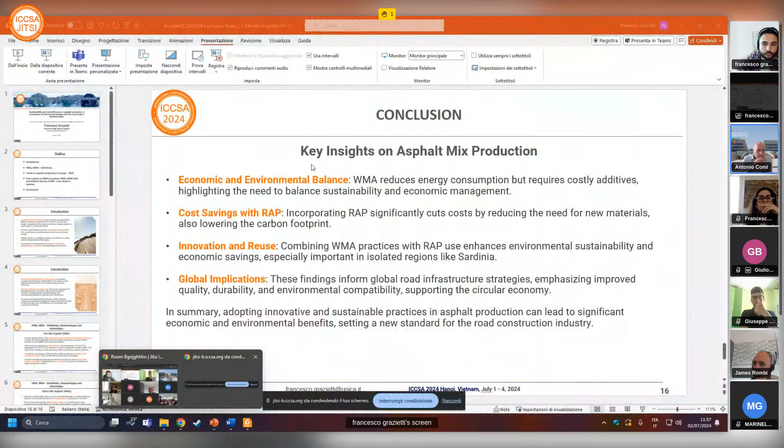Okay, please, Mauro. Yes, thank you, Francesco, for your very interesting presentation. Just a brief thought on this very interesting experience that you presented us. I was wondering if there is a problem with the procurement procedure that perhaps should be rethought or redesigned in order to introduce some sort of a pay factor criteria that can reward roadworks enterprises that are willing to use these new mixes that are able to reduce carbon footprint and so on.

I mean, obviously, you demonstrate that there are different ways to reduce environmental impact. But I'm wondering if the roadworks enterprises should be aware and should be stimulated to use this new approach. And this perhaps could be obtained also by modifying procurement procedure. And unfortunately, in Italian regulation, you don't have so much room for this kind of modification. I just want to have your idea on this subject.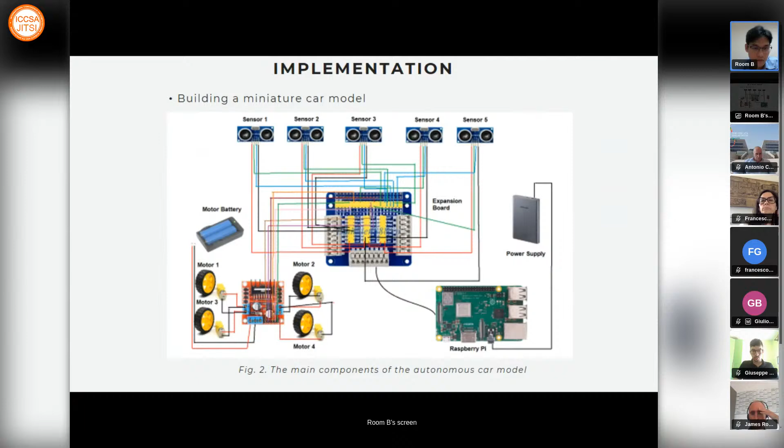We use an ultrasonic sensor, one of the most popular sensors in robotic projects, to get the state of the environment. We have a motor driver, expansion board, and power supply for the miniature car. And this is the design of the shell for the autonomous car model.

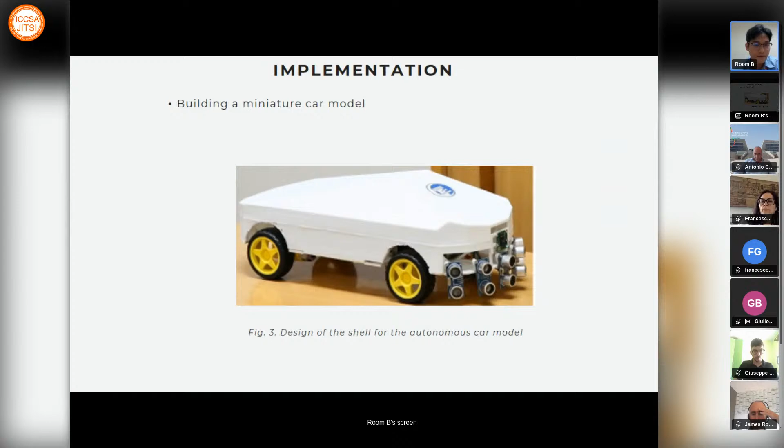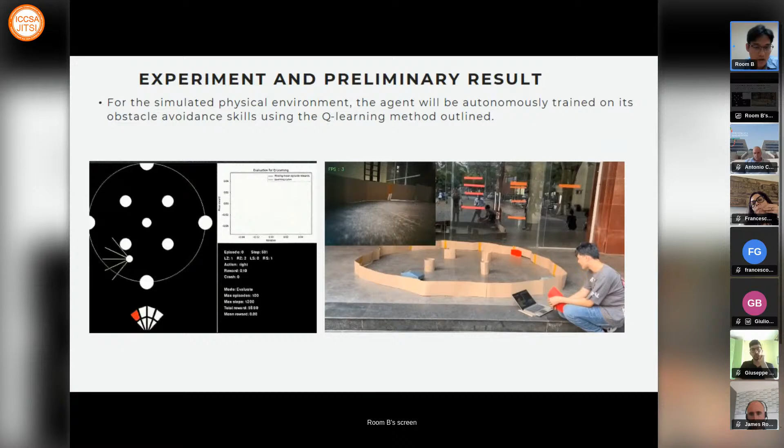In the formula, there appears the learning rate alpha. It defines the size of the movement away from the current state when exploring. It also contains the discount factor. It defines how much to downweigh uncertain future rewards. We implement our algorithm in a simulation, and we deploy it into a miniature car model.

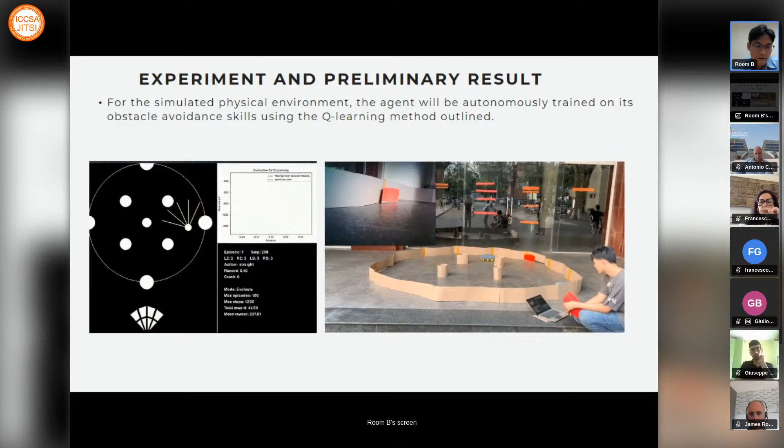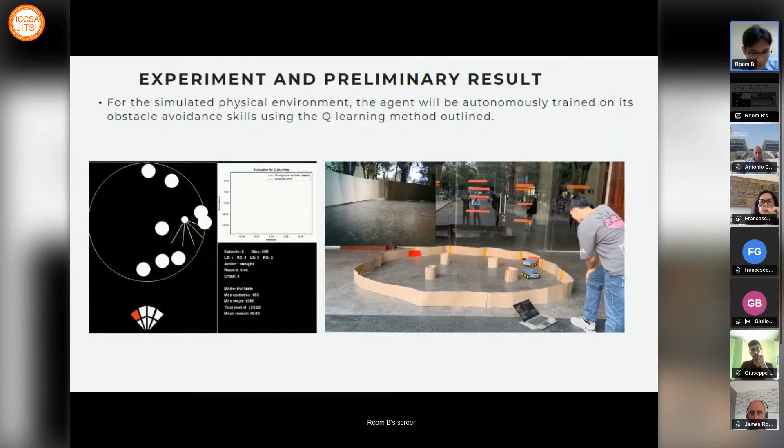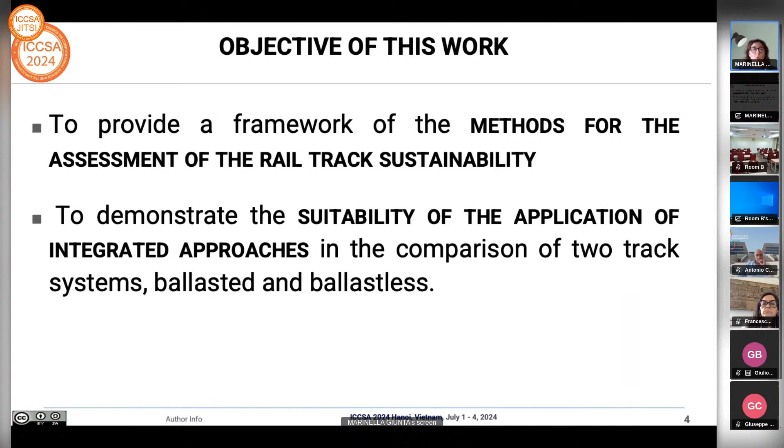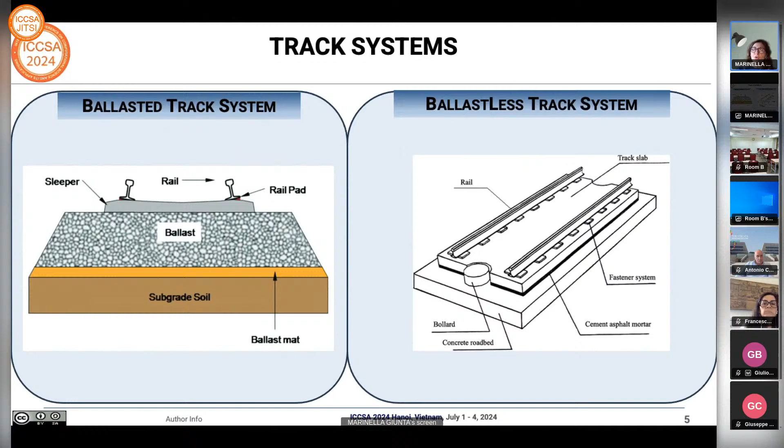When we talk about track systems, reference is made to two main systems, the ballasted track and the ballastless or slab track. The ballasted track consists, from top to bottom, of rails, sleepers, fastenings, which fix the rails to the sleepers, ensuring the gauge, namely the right distance between the rails, the ballast and the subballast. The ballastless or slab track, as the word says, lacks ballast, and the rails are fixed to a slab made of concrete, which has the function of support and load distribution.

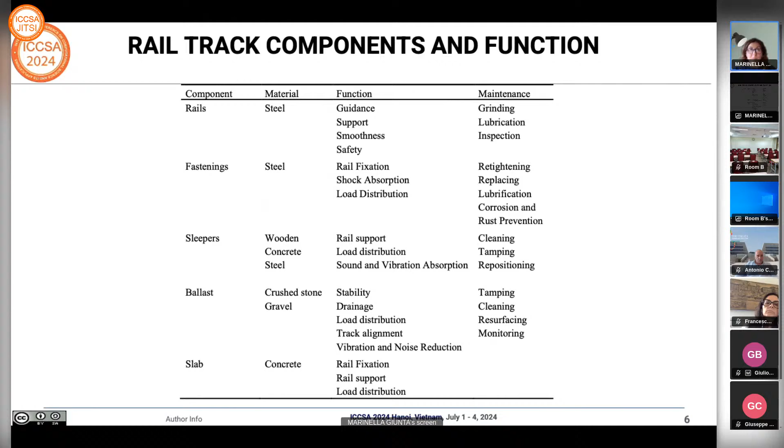In order to assess the sustainability of rail track, it is fundamental to consider the life cycle. Life cycle, according to the ISO standard, consists of 4 stages, namely the production stage, which encompasses 3 modules: the raw materials extraction, in this case steel, aggregate, cement, water; the transport of raw materials to the manufacturing factory, and the manufacturing of the track components.

The construction process is divided in transport of components from the factory to the construction site, and the construction installation process. Use stage includes use, maintenance, repair, replacement, refurbishment, and also operational use of energy and water. And finally, the end of life stage considers the construction, demolition, the transport, the waste processing, and the disposal.

It's important to consider the life cycle of the track, because at any stage of the life, the decision-making process can affect the sustainability. More specifically, in the design and construction stages, the selection of the more appropriate track system, ballasted or ballastless, in function of the level of traffic, axle loads, train speeds, the type of materials and components, their supply mode, and the hauling distance, as well as the construction schedule, are elements which greatly affect the sustainability.

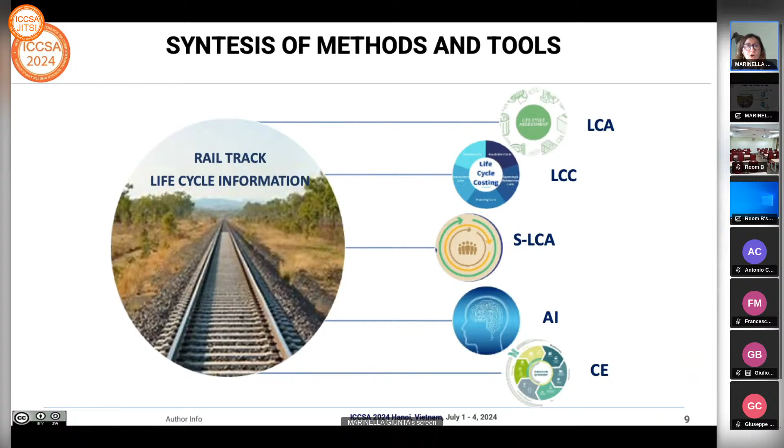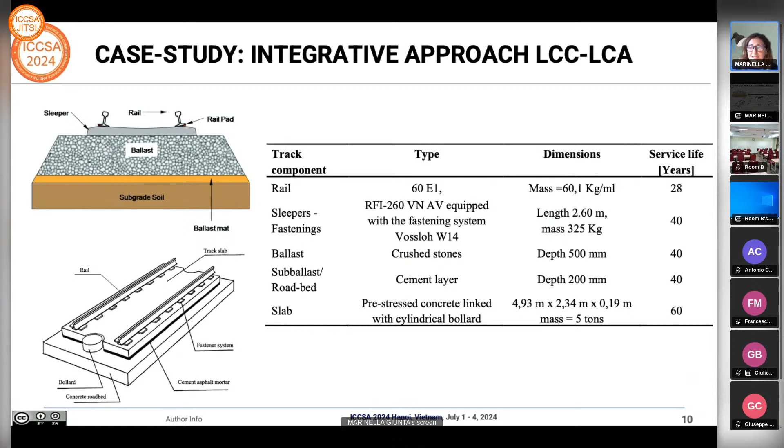According to the proposed integrated method, the life cycle costs for each track solution encompass company costs, costs due to the construction, maintenance, renewal; the user cost, mainly referred to the delays produced by the maintenance and renewal activities; and the environmental costs, considered as the cost of the carbon dioxide emissions and calculated using the life cycle assessment.

It's worth noting that at the end of construction, corresponding to year 0, the slab track exhibits a total cost about 1.5 higher than that of the ballasted track. This is a result in line with the literature. At year 0, the total cost consists of the construction cost and the environmental cost, while the user cost is null. Break-even is observed at about 28 years. After that, the total cost of slab track remains lower, albeit slightly, than the ballasted one.

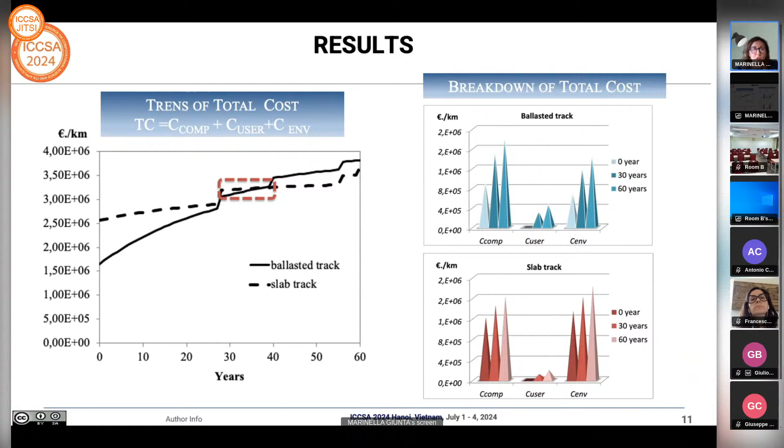In conclusion, a framework of methods and tools used for the assessment of the sustainability of the track has been presented, and the proposed methods have great potential to support the decision-making process, as demonstrated by the case study comparing ballasted and ballastless track systems. Integrating technical and environmental issues is sometimes a tricky exercise, especially because several data are required to do reliable appraisals, but it remains the right way for a comprehensive, complete comparison among different alternatives.